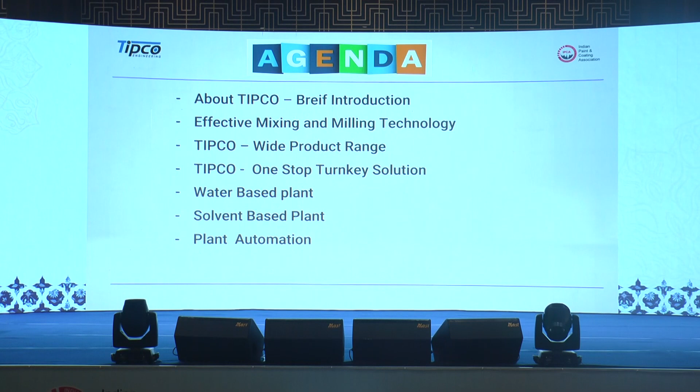So today we are here to present about TIPCO. Basically, we are the equipment design and consultancy, process, automation and packing solution we can offer to the industry. Today's agenda is about TIPCO, a brief introduction of TIPCO and what exactly we are into.

We are into effective mixing and milling technology. TIPCO, we have a wide product range we can cover for the paint, ink and coating industry. TIPCO today, we position ourselves as a one-stop turnkey solution supplier to the water-based as well as solvent-based industries. And a brief on water-based plants, what we can offer to that industry.

And again, solvent-based plants and a little bit of plant automation. Today, it is a buzzing word everywhere that IoT 4 or Industry 4.0 is coming up. So a little bit on plant automation, we can go into touch on that.

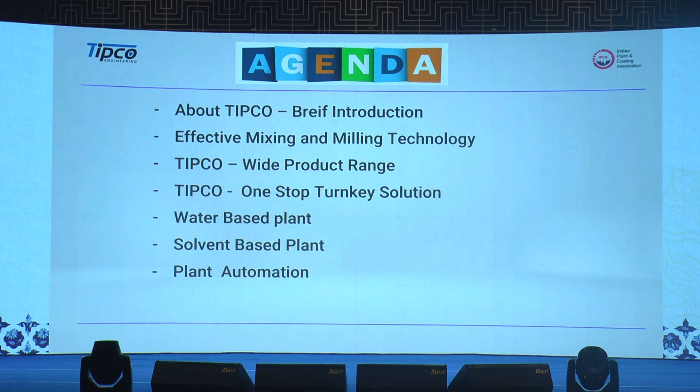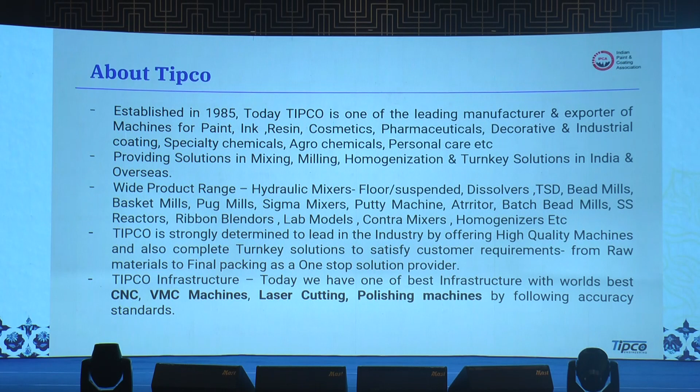So just a brief on TIPCO. We are a company established in 1985. Today, TIPCO proudly can say that we are one of the leading manufacturers and exporters of machines in paint, ink, resins, cosmetics, pharmaceuticals, decorative and industrial coatings, specialty chemicals, agrochemicals and personal care. And we are providing solutions in mixing, milling, homogenization and turnkey solutions in India and overseas.

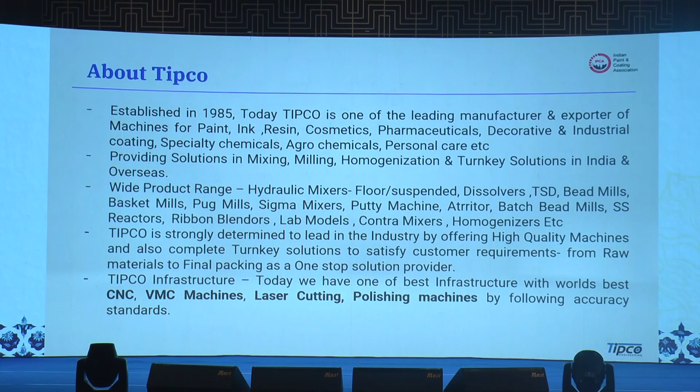We have a wide product range of basket. We have hydraulic mixers in both floor and suspended dissolvers. We are into TSDs, bead mills, basket mills, pug mills, sigma mixers, putty, attritor, batch mills. We also do reactors. We have one of the best lab models, contra mixers and homogenizers.

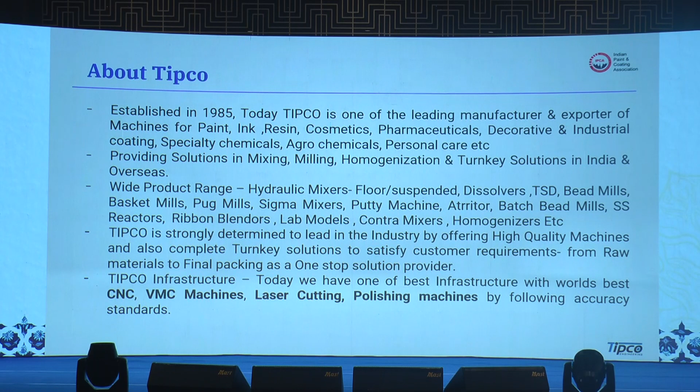Today, TIPCO is strongly determined to lead in the industry where we produce very high quality machines and also complete turnkey solutions to satisfy customer requirements from raw material to the final finished product.

Today, TIPCO infrastructure, we have one of the best infrastructures with world's best CNC machines, VMC machines, laser cutting, polishing machines, following accurate standards.

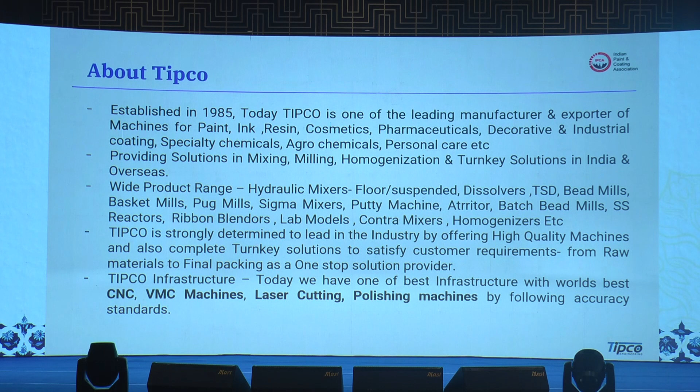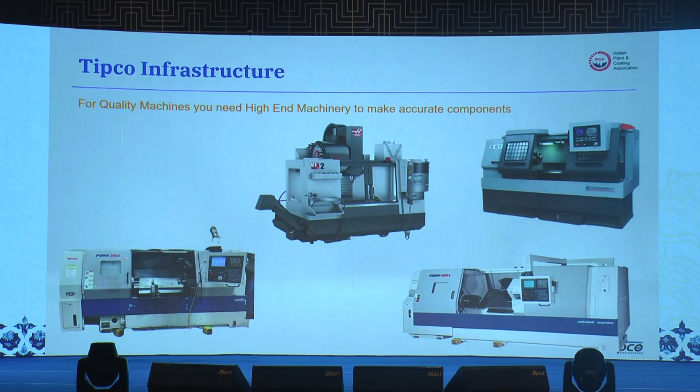So to get a better product, we need better machines. So we have wonderful high quality Doosan machines in our factory. These are one of our machines running in our factory.

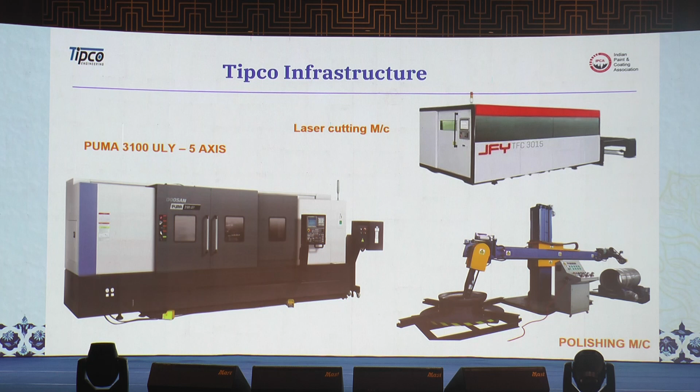And we have one of the latest Puma machines, which is a 5-axis machine, where we can make any single component with the most accurate laser cutting machines, and we have polishing.

A bit more, we have a laboratory setup where customers can come and do trials in our factory. We have approximately 50,000 square feet of production area.

Today we have a 90+ workforce with our in-house design team, in-house engineering, where we can offer customized solutions to each and individual customer. Today we ourselves are focused on turnkey solutions, where from 50 tons to 500 tons per day production capacity, we can offer solutions.

We have our own design teams where we can get better every day. So we have a design team to give better solutions, efficient product and process solutions. To support you, we have offices in Delhi, Sonipat, Pune, and we are still further expanding.

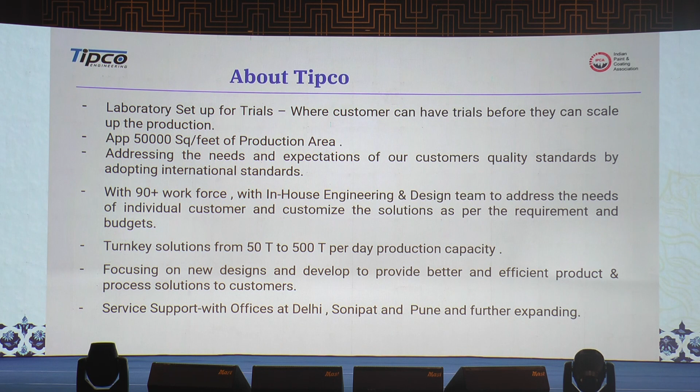These are some of our key clients, like we are in Normet. We are one of the major suppliers to most of the industries in painting and coatings, and also in construction chemicals. These are a few projects we have already done with Sirca, Normet, Sunlac Paints, Crystal, Acro JK Cement.

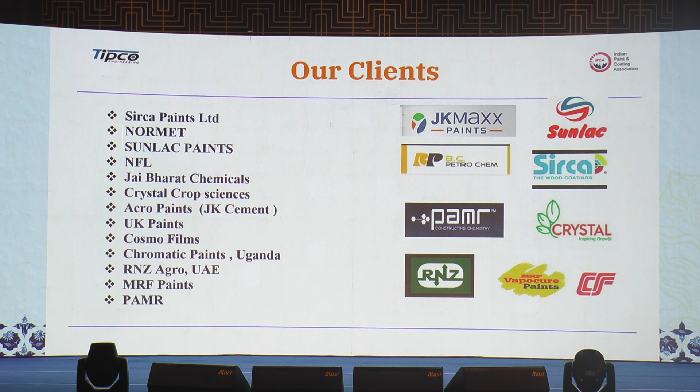To brief on our wide product range, what we exactly offer into the industry, sir, we have high-speed dispersers with both hydraulic as well as floor mounted. In this, we have single stage, single shaft, multi-shaft, vacuum, scrappers, and homogenizers.

We have TSDs with single, coaxial, and 3-shaft, multi-cowl design. Mixers, we can position in fixed type as well as on the load cells. We have basket mills, we have horizontal bead mills or dyno mills, in disc, peg, and agitator designs. High shear homogenizers both in tank as well as bottom in line. Batch bead mills, attritors, lab models, and customized solutions.

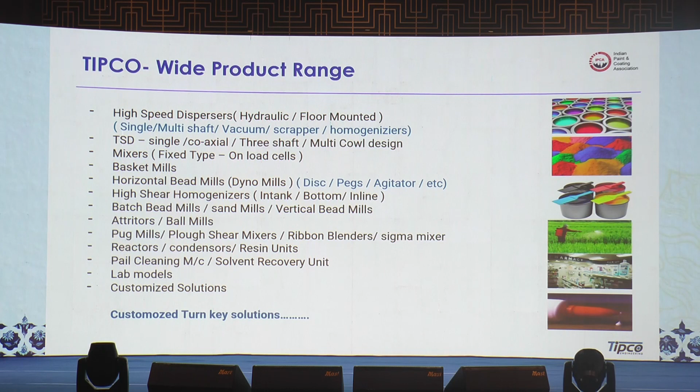Coming to effective mixing and milling, everybody knows it's a very important process in each industry. So first the material should be wetted, dispersed, and properly stabilized.

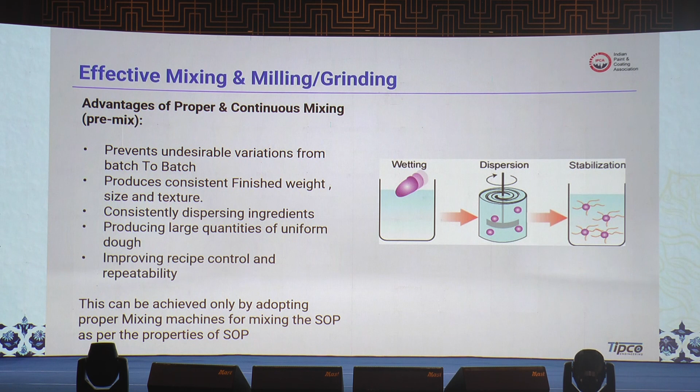Coming to mixing, sir, we have a wide range of mixers with various designs and blades. You can see the butterfly design, cowl design. In cowl design also we have a wide range of blades where we can offer any type of mixing solutions.

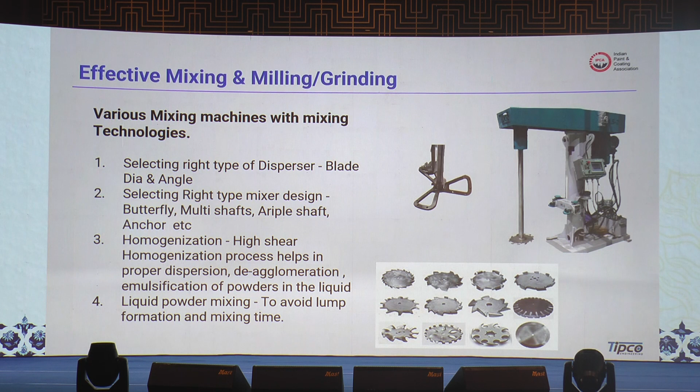This is various ranges of dissolvers we have, with vacuum, with lifting systems, with grippers, with different types of blades - scraper blade, twin blade, and butterfly blades. And we can offer a range from 1 HP to 300 HP.

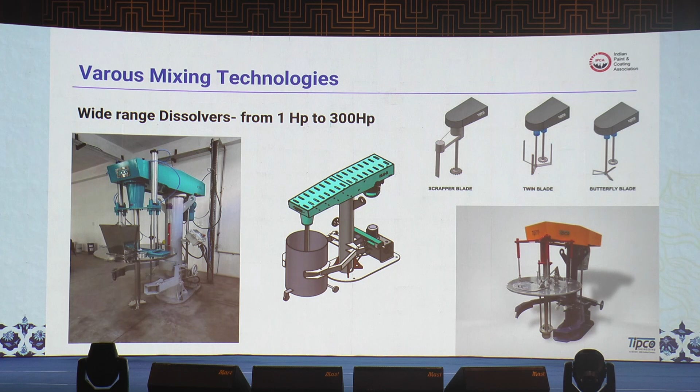Coming to homogenizers, sir, we have high shear homogenizers with the rotor-stator design process. In this we can offer in tank type or inline. In inline we can offer single stage, 2-stage, and 4-stage. We also have bottom homogenizers where from the vessel it can be taken and recirculated. And we have a super series with 4200 RPM for special applications.

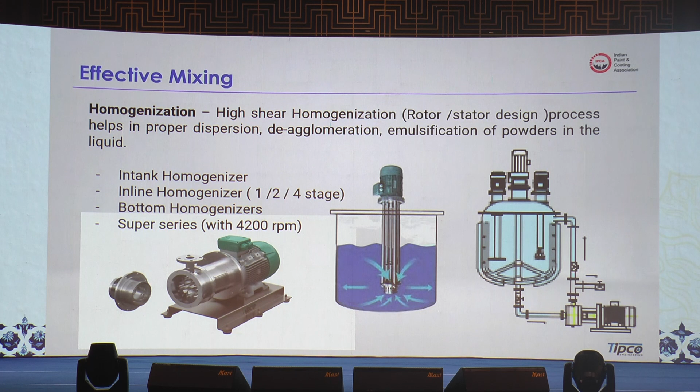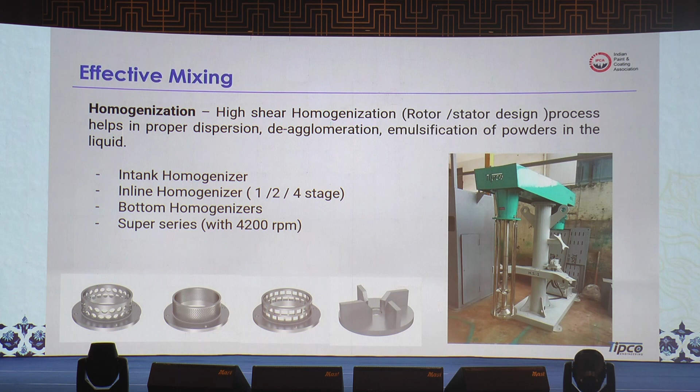In this homogenization, this is a hydraulic type we developed recently where we can offer different types of blades. You can see there are 3 stator blades with emulsion, agitation, and emulsification. So we can give all the designs in the hydraulic system of design.

Today we have also developed what's called a basket mill. We have given it to various industries and the performance is very good. It's a big subject in itself, but it comes with the mixing as well as grinding technology. We have our own in-house design team where we developed this basket mill and got perfect results. I will share some trial reports where we've already been successful in basket mills.

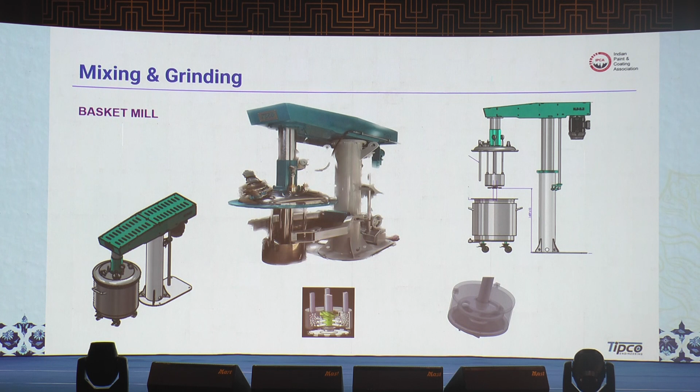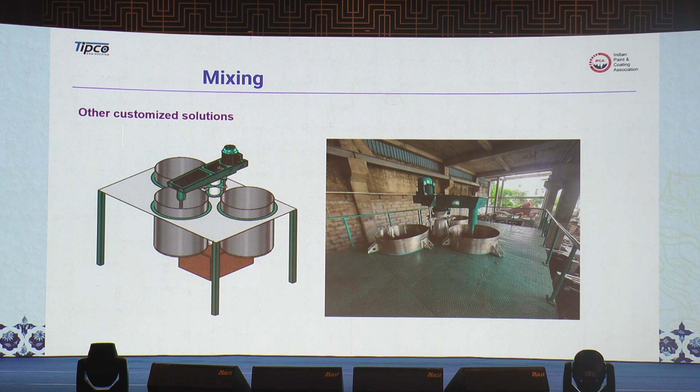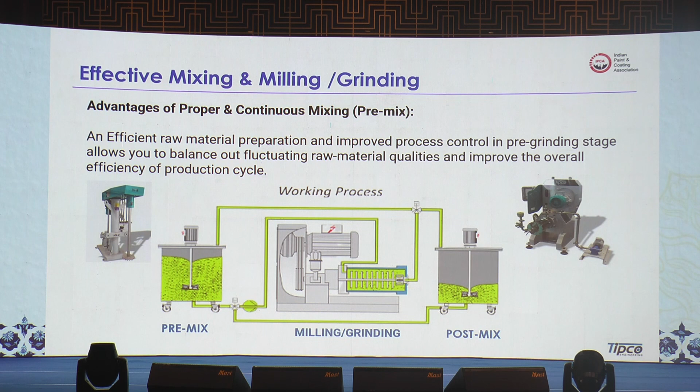Coming to bead mills. This is the process you generally have - premix, milling and grinding, and post-mix. So in this we offer a wide range with the mixing, like dissolvers. In bead mills we offer a wide range.

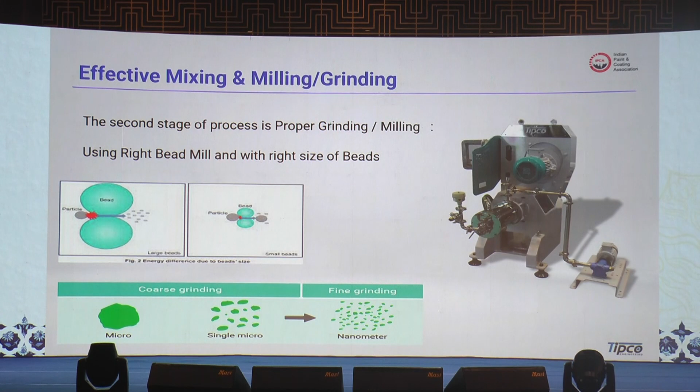Recently we developed a lot of super series in bead mills. We have the full range from THM, from 5 liters, 10 liters, 15 up to a range of 100 liters, with flow capacities of 0.5 LPM to 30 LPM.

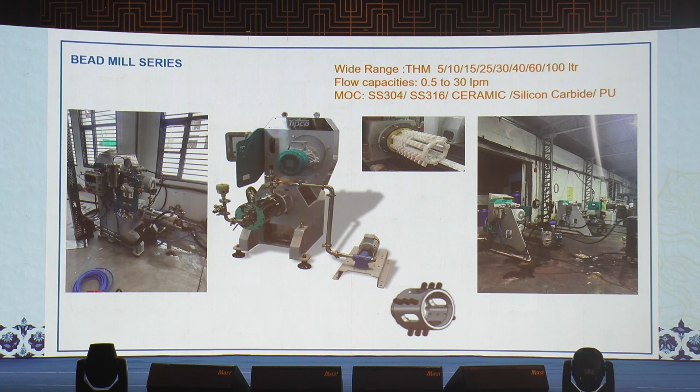And in MOC, we developed a wide range of materials with SS304, SS316, ceramic, silicon carbide, and PU to address all the industry requirements.

This is one of the pictures we are already running at various factories, and this is our design. You can see that design with pegs also.

We are offering various metallurgies - to show some of the shells we provided here with ceramic and silicon carbide. We also developed a premium series with the THD and THC, which comes with a higher range of MOC as well as a PEGS design.

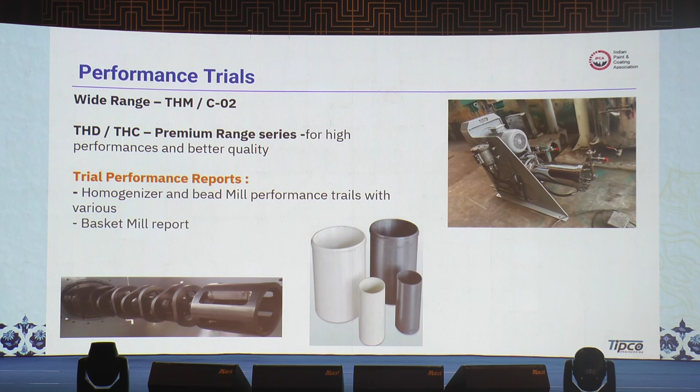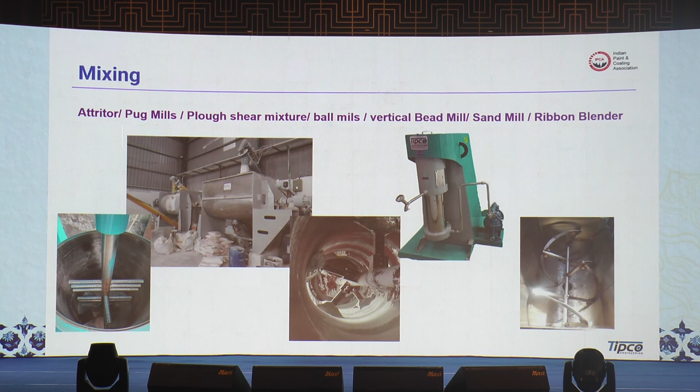Just to show what product range we can offer - we can offer attritors, pug mills, plough shear, ball mills, vertical bead mill, and a few ranges of lab models. Today, when you go into production, everything needs lab models. So we have a wide range of lab models.

We can even offer some customized solutions for your requirements. It's a wide range where we can offer from 200 ml to a capacity of 5 liters, with a touch screen and all the options you can have.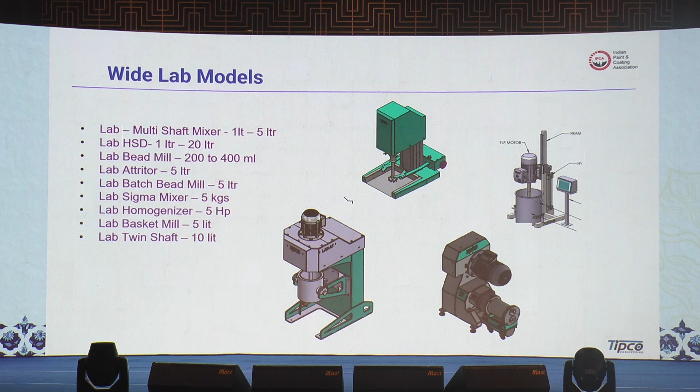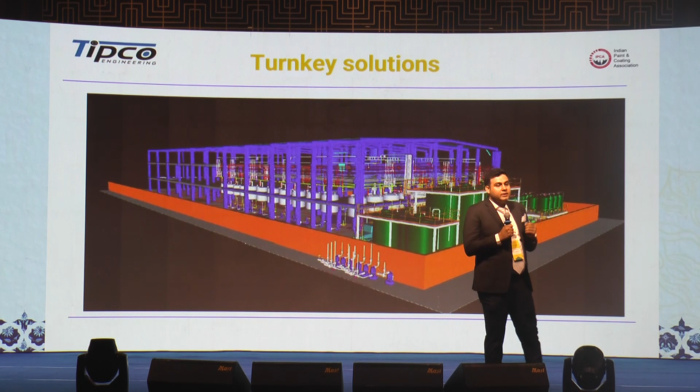Good morning, everyone. So basically, what we require exactly today, when we go to talk to anyone, is basically automation. And how many companies are there who are going to give the complete solution for your complete process, like if you want a production capacity of near about 5 tons, 10 tons, 15 tons, or 20 tons, might be 100 to 200 tons per day.

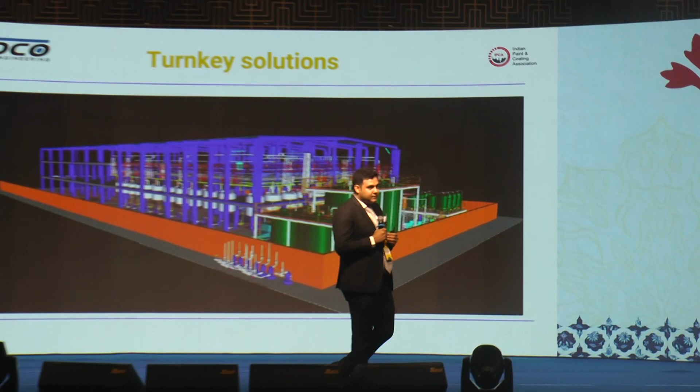As TIPCO, today we do 250 tons per day, water-based, including water-based primers, distempers, emulsions. In this project, I'm going to describe what we can do, both on the bigger segment and in the SME segments.

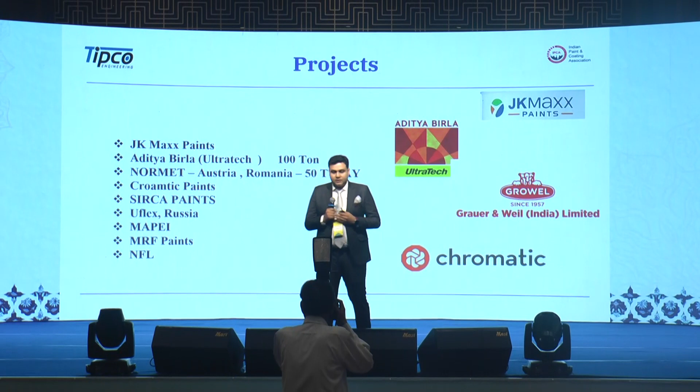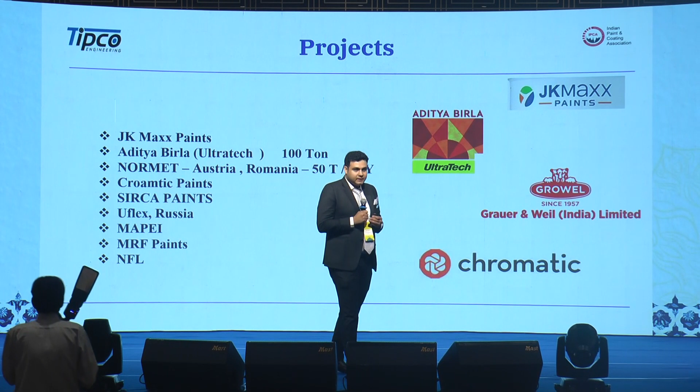Right now, we are doing projects for majorly 3-4 companies. We just got an order from JK Maxx Paints also. We are doing capacities near about 250 tons per day for water base. Aditya Birla primers, we are doing for them, near about 100 tons per day.

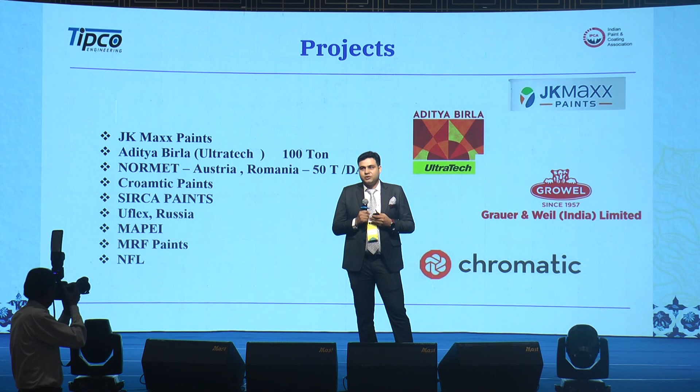These projects include everything from their ground level, from civil work till production and storage capacities. Everything is designed and manufactured by us. We are also doing one more project abroad, for Normet.

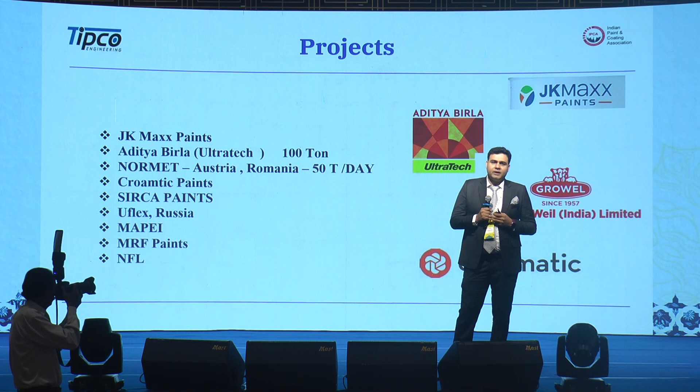You might have heard about that construction chemical. It is similar to water base, where water is added approximately 20 to 30% and the powder levels are high. We are also doing chromatic paints, SIRCA paints, and a new water-based plant coming up.

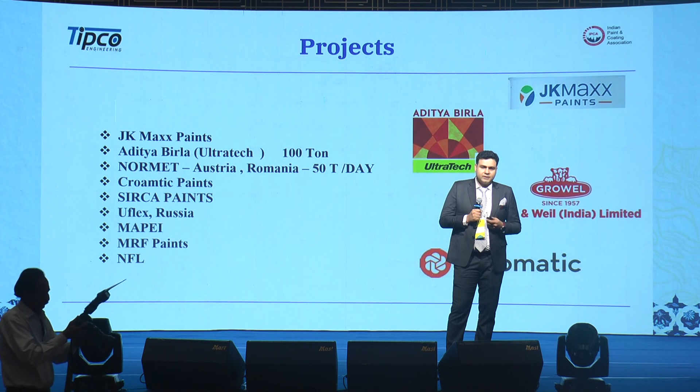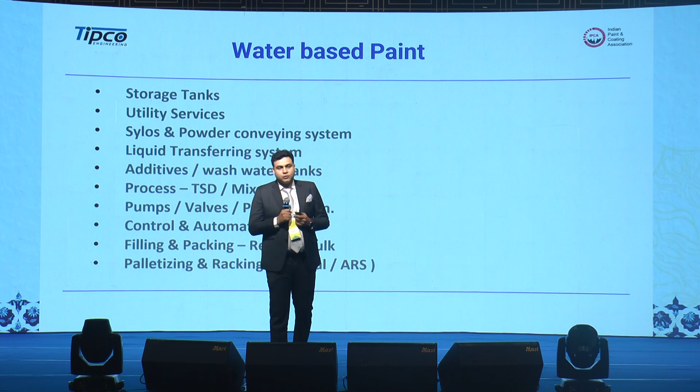What are the things which we need to check in the water-based plant when we are deciding the plant? The first thing is storage tanks. When we talk about storage tanks, they are the emulsion tanks.

That is the first thing, because we know in the paint industry, when we are making water-based paint, we need to have different kinds of emulsions, because we are going to make different kinds of products like primers, high gloss, distemper, and high gloss luxury emulsions.

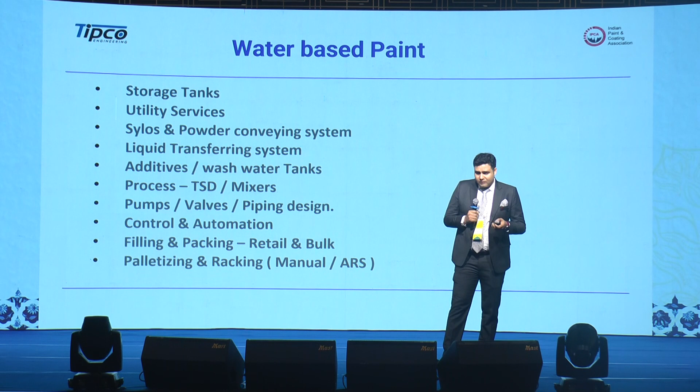So for that, the first thing is storage tanks for the emulsions. The other thing is utility services. When we are designing a plant for water-based or solvent-based paint, important to run that plant is the utility services.

That includes your chillers, your compressors - those capacities we design on your behalf while designing the plant. Silos for powder conveying - if we talk about the water-based product, handling the powder is much more difficult. If we talk about 200 tons of water-based paint, that means approximately 100 to 150 tons of powder you need to store in your factory.

And if you have production planning for 1 week or 2 weeks, then the capacities go up to 1,000 tons or 1,500 tons. So for that, powder conveying systems and silos we offer in the market to handle the powders in a better way. Then there's the liquid transferring system.

As for the liquid transferring system, you are transferring water in actual values, whatever values you want in your machine. Secondly, your emulsions and additives - that also comes in the liquid transfer.

Now, I'm going to describe the process of automation for water base, from TSD to mixer till packaging. We have some solutions for packing machines also, where we can commit 1 liter, 24 boxes per minute, till cartoning - meaning packing, capping, reweighing, cross-check whether it has the material of the kgs which you have set.

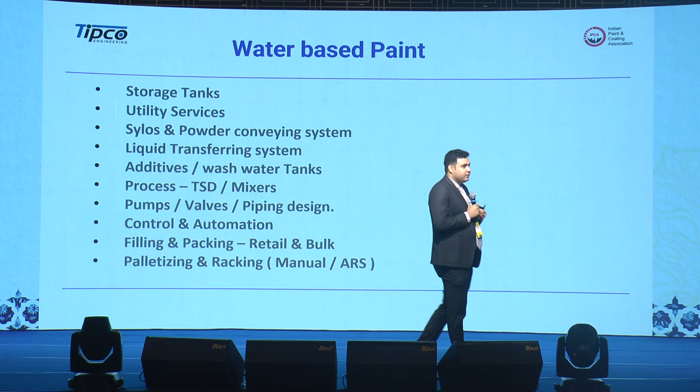So that's what we are doing in packing. For retail and bulk, we are doing it both ways.

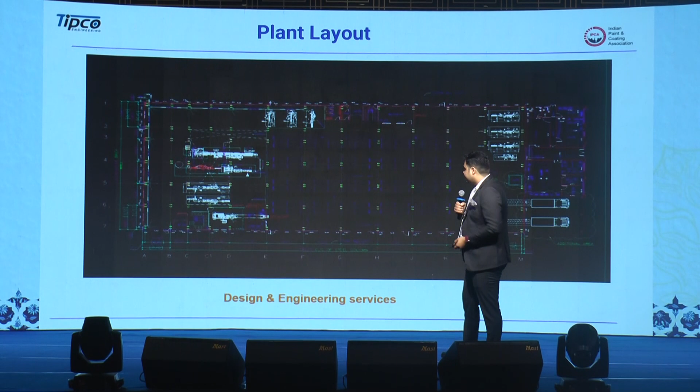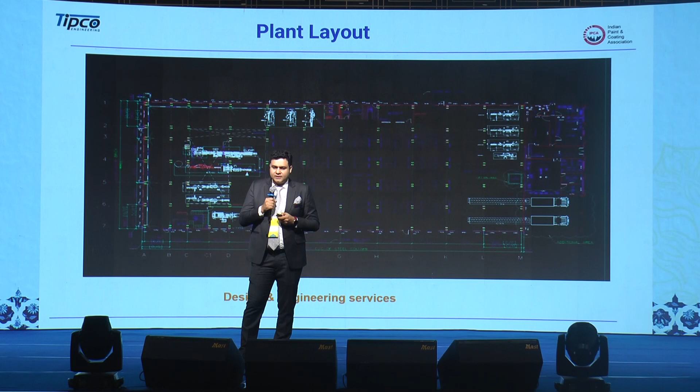For TIPCO, when we talk about the plant layout, we cover your office block, labs, production area, and storage capacities. This is the basic first thing - whenever we meet any customer for designing a plant, we basically present the complete idea of how to move with the automation plant.

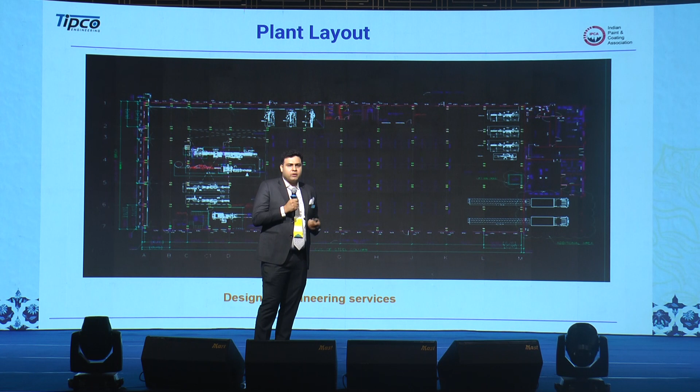We start with the storage tanks. When we talk about storage tanks, we have a few systems. The lorry comes with the emulsions and unloads into the storage tank.

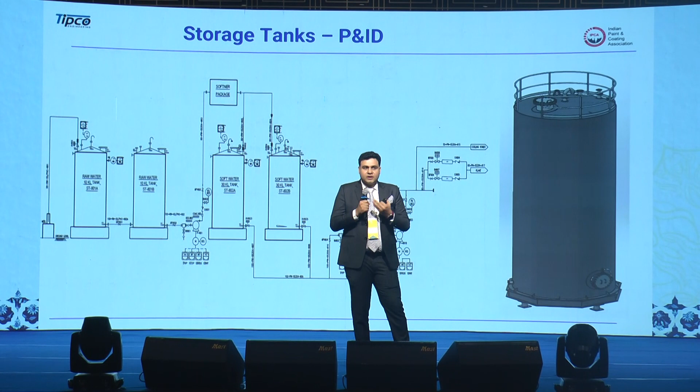It is the first area, and once it is clearly calculated in the water-based area, so whether for tomorrow, today, or 1 week, your production is clear - which products you can take, what RMs you can take. We can calibrate the storage systems with your software also, which can help you in future planning of your products.

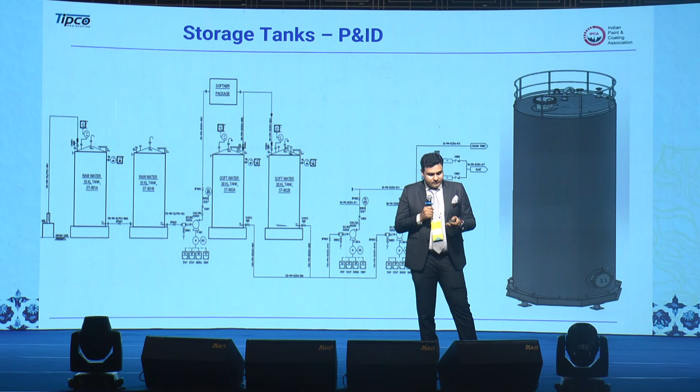If we talk about the P&ID or the process of the automation water-based process, practically there is a TSD on the first stage. Because for our water-based products, like emulsions and primers, we need to have a mill base of the powders with water and a few additives, so that all comes automatically to the TSD. That is the first stage of mixing. The material coming from the storage tanks, might be additives or emulsions, is then shifted to the second stage with the help of a gear pump, maybe 24 meter cube, and the TSD needs to be emptied, maybe in 3 to 4 minutes. So after your mill base is ready in the TSD, you can transfer this to the mixing tank.

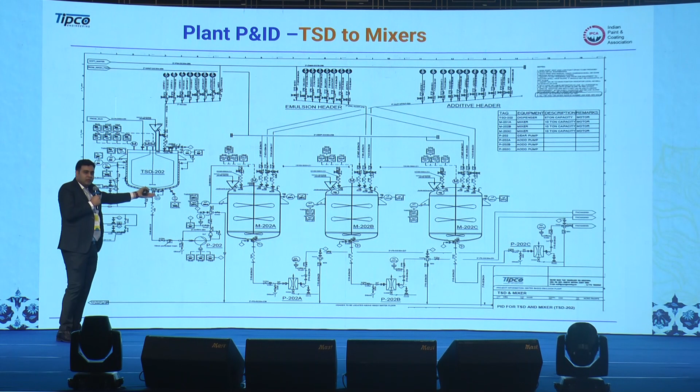Practically, if we talk about oil base, it is much more difficult. But when we talk about water base, it is really simple, but it needs a lot of power because viscosities are high and mill base powders are high, so we need to give more power. Once your process is designed, primers or emulsion will be transferred to the mixing tank. The mixing tank is basically a let-down tank, or some companies call it a packing tank, where you add the final emulsions for the final touch up. Once the mill base is ready in the TSD, the final work is done in the mixing tanks. And when we want to increase capacities, like any company wants to make 10, 20, or 30 tons, it can be done very easily.

For any process, we have a defined process for water base, for how long it takes for primers or emulsions. If we talk about TSDs, filling them with liquids and powders using the automated powder system takes 15 minutes for a 5-ton TSD. Transferring to the mixing tank takes a maximum of 30 to 40 minutes, and then finalization and packing. We can make different shades from 1 TSD to 3 mixing tanks. So this is the basic P&ID process flow diagram for water-based paints with automation.

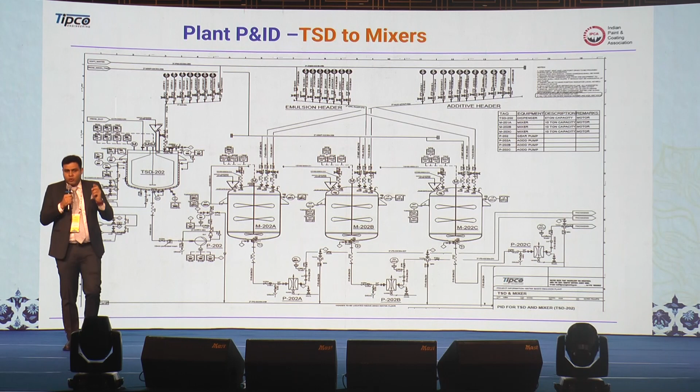As TIPCO, we were very much into mills earlier, but now we have moved to the TSD. When we talk about water-based, TSDs are very important in the industry. For the TSDs in the complete system, we provide hydraulic lifting, a centric design with a center shaft, and for making 5 tons or 3 tons, we can have a motor of 250 HP to give better performance. Secondly, the scrapper is there. So in coming days, whenever we talk about water base for huge capacities, the first thing that comes is the TSD.

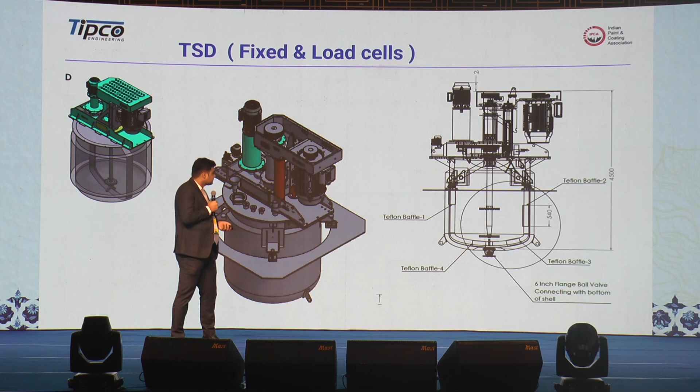Second, which I told you, is the mixing tank, which comes just after transferring the material from TSD to mixer. This is our mixing tank, where we finalize the product and then shift it to the packing machine for packing.

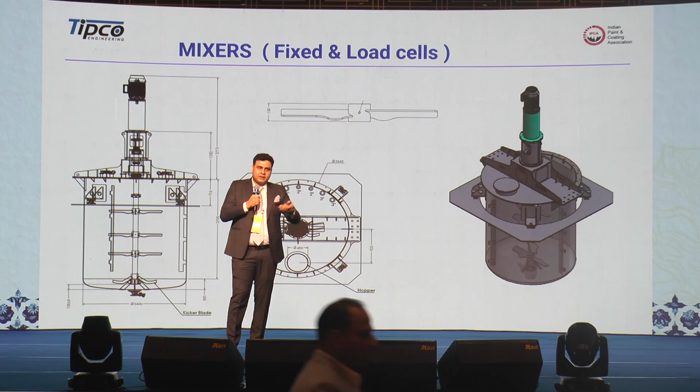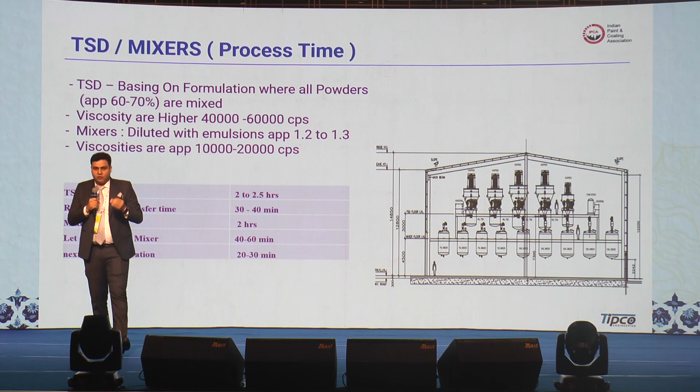If we talk about the process, this is the process time batch system with our system, which we are offering as TIPCO for the water-based complete solution. For the TSD batches, this is 2 to 2.5 hours. Raw material transferring time is 30 to 40 minutes. Mixing time is again 2 hours. That means our final material, 5 tons reducing viscosities, is approximately 8 tons of material. The capacities can be increased by increasing the size of the TSD and the size of the mixing tank.

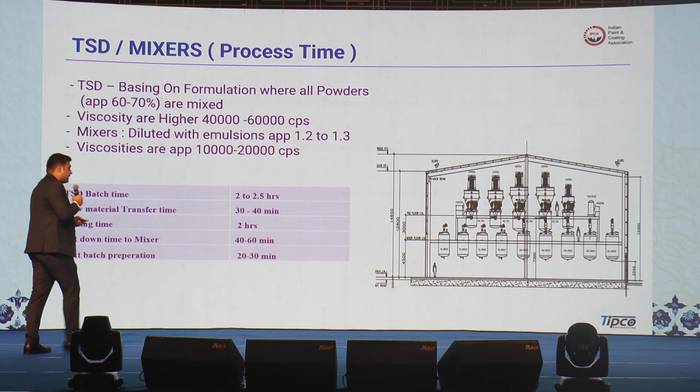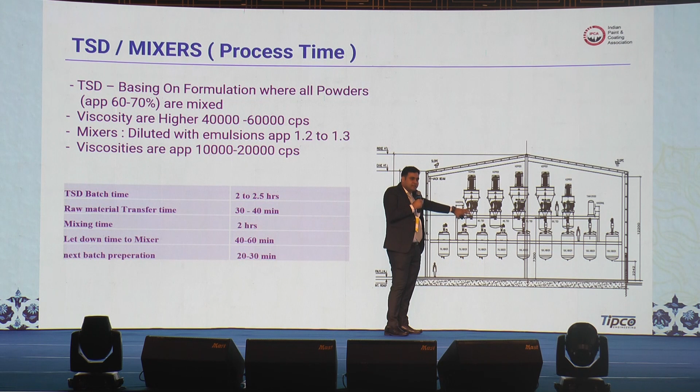For the next batch preparation, cleaning and other things need to be prepared in 20 to 30 minutes. You can see in this diagram how the powder comes on the top. This is the powder post-weighing silos, which transfer the material to the TSD, then TSD to the mixing tank, then again to packing. So this is the complete flow for the water-based paint plant.

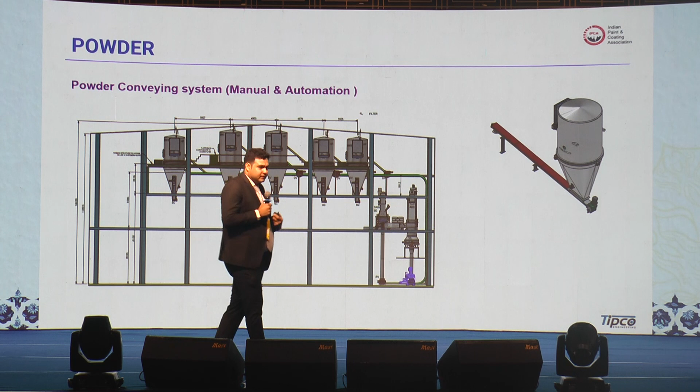This is the basic powder automation which we are offering in the market. Right now we can handle the complete powder solutions. If somebody needs to store 100 tons, 200 tons, or 500 tons of powder in an automatic system, and transfer that powder after weighing to the TSD or the mixing tank, that is possible with these systems.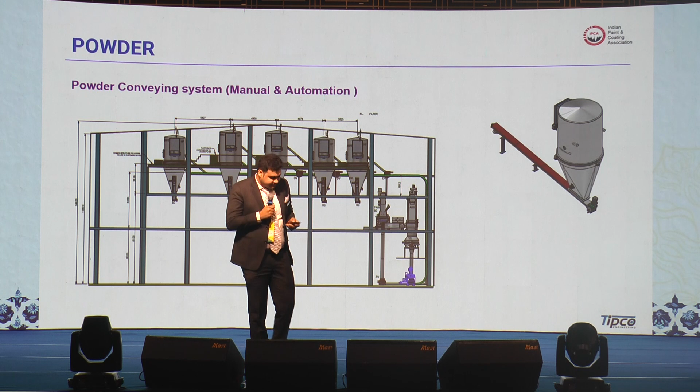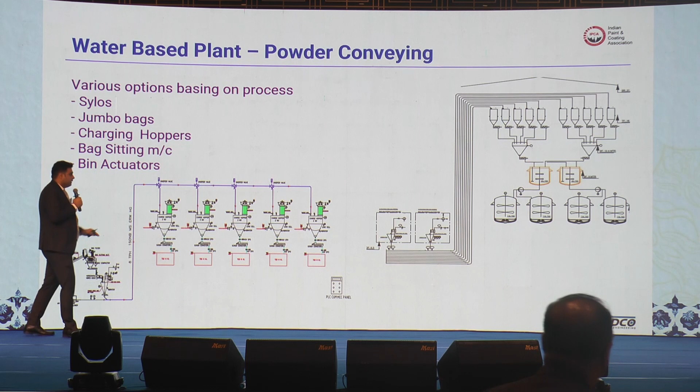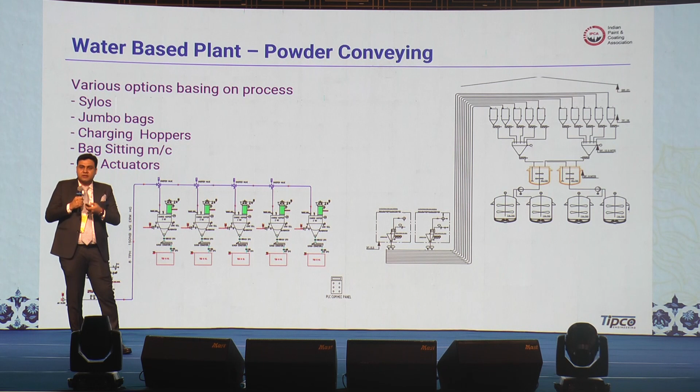The basic flow chart for the water-based powder conveying system: you just need to take a bag, 25 kg, 30 kg, any standard bag, you don't need to cut it. You just put it in the slitting machine, then this machine will transfer the complete powder to the pre-weighing silo or the batching silos. Jitna bhi hum apne process ke andar labor save kar payenge aur storage capacities ko badha payenge utne area ke andar, that even only possible with the powder conveying system.

This is basically for your additive storage tanks and additive automation.

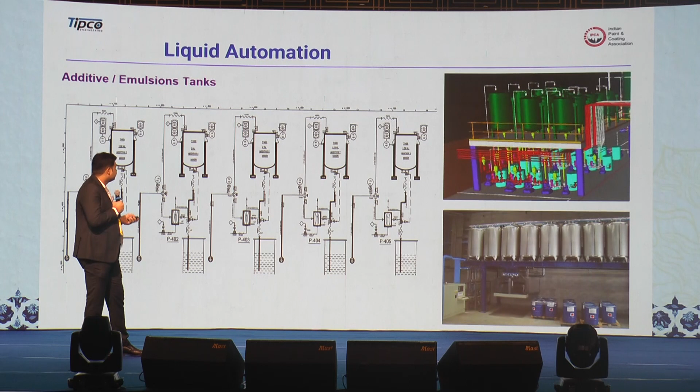Pigging system is basically used to clean up the complete line from TSD to the mixing tanks.

Retail and bulk packing machine, as I told you, for the retail and bulk packing machines we have options to pack near about 24 4-liter boxes per minute and 48 per minute. This is the minimum capacity which we are offering. We have capacities till 72, 1-liter boxes, with weighing and cartoning. The speed of the machine is combined run with the filling to the cartoning system till labeling.

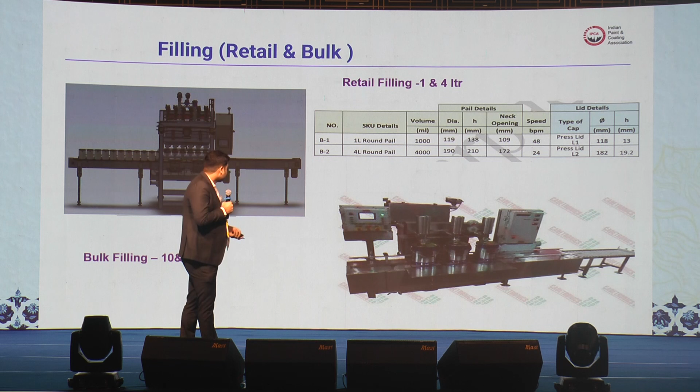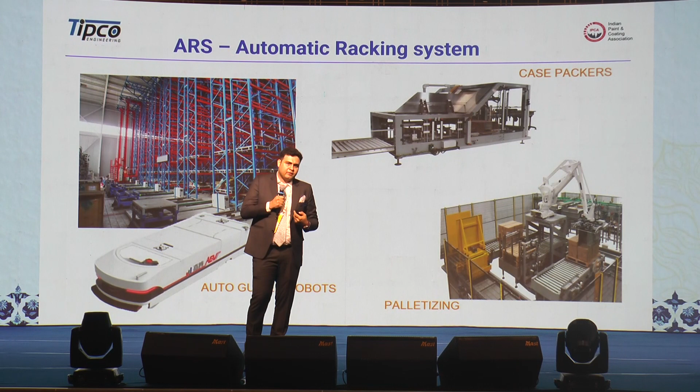This is ARS system, it is very famous nowadays. Everybody wants to work with the storage capacities of the powder in their factory. And in coming time, because we need to eliminate a lot of errors for the dispatches and storage capacities, these systems are coming in the market. We are doing this for two companies. The complete ARS system, those systems are really very big for the storage of everything, all the raw material and finished goods.

The oil-based automation is simple, just a bead mill added in the system.

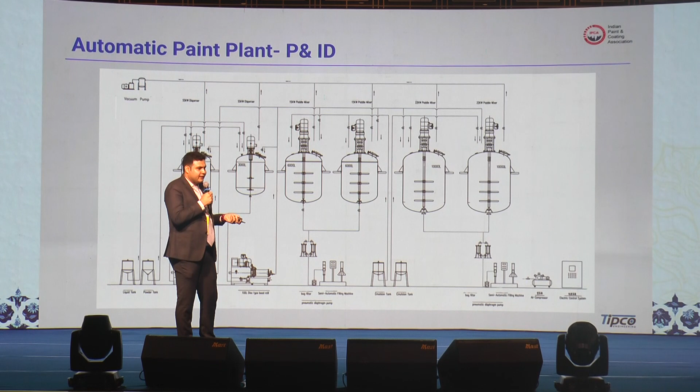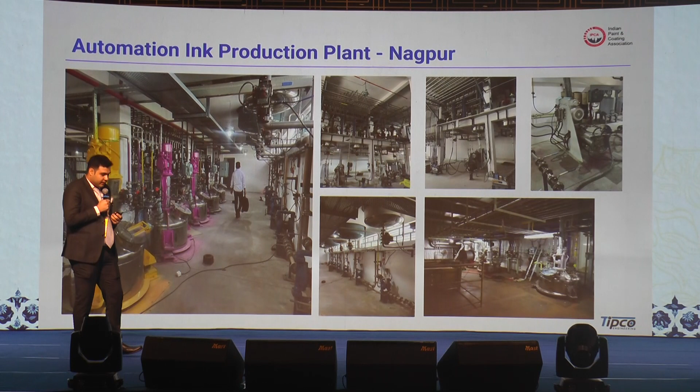These are some photographs where you can see how the plants are designed, and our specialty is whatever space you offer. Hum log apne customers ke liye, we see always the project designing is a challenging thing. The challenge is when you say this is a brownfield project. See, greenfield projects are always easy. Whenever we talk about brownfield, we have to work for you as per your requirements. And really, in this project also, you can see the spaces are very less, but we are able to manage the production area and give the customer the complete automated system.

This automation is for your storage tanks, for the solvent, might be for your emulsions. This is a basic P&ID in the process.

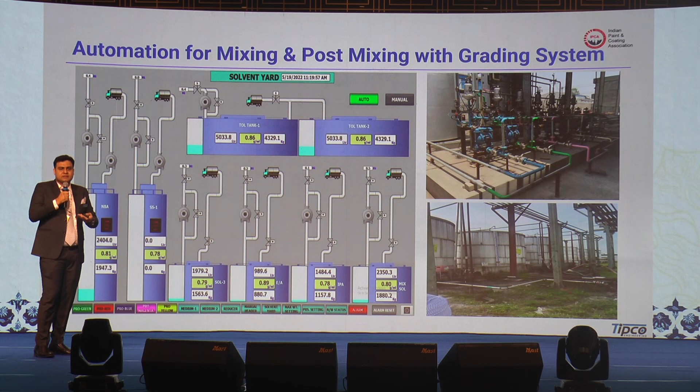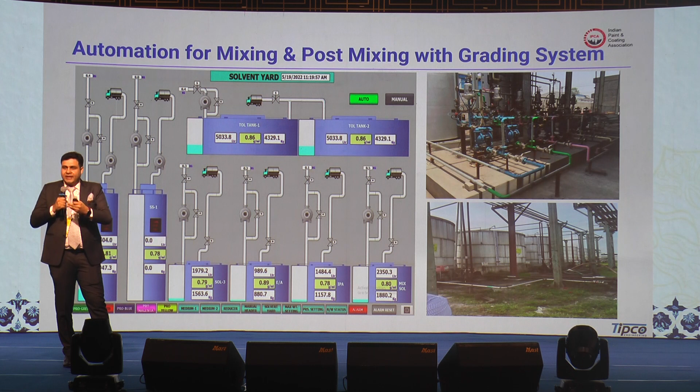See, if you want to know how much material is there in your tanks, in the complete SCADA system or completely on your computer, today the technology is very high. Whatever data you want to know is on our fingertips, it is possible. The capacities, the material, when it comes, when it is about to get over, it is calibrated with your production. It can be done in a very easy way, because ABB and Siemens, both companies are working with a lot of paint companies, and all their toolbox galleries are ready as per the paint manufacturing requirements.

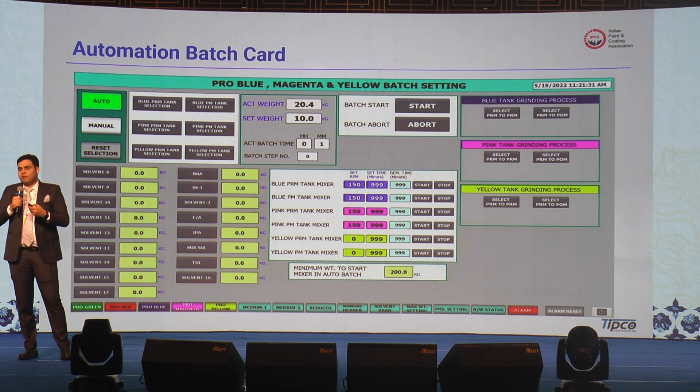This is a basic batch card for the automation. Whenever you're planning to have batches, it can be made as per this.

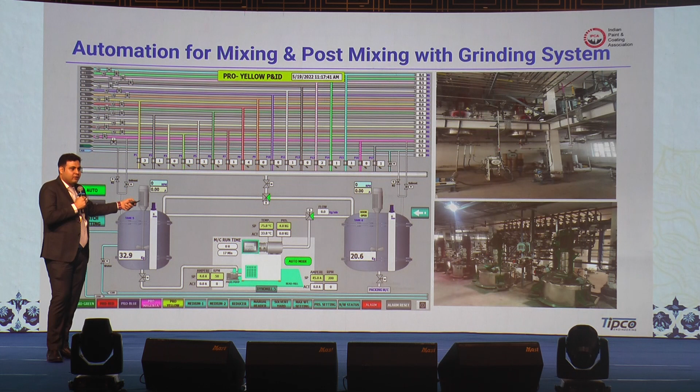Automatic post-mixing and mixing grinding system. This is basically when we talk about the oil-based epoxies, PUs, including grinding mills. Nowadays, for the TIPCO, grinding mill is one of the parts in our complete process, so it can be adjusted in any system. For pre-grinding or post-grinding, wherever it is required, we can adjust it.